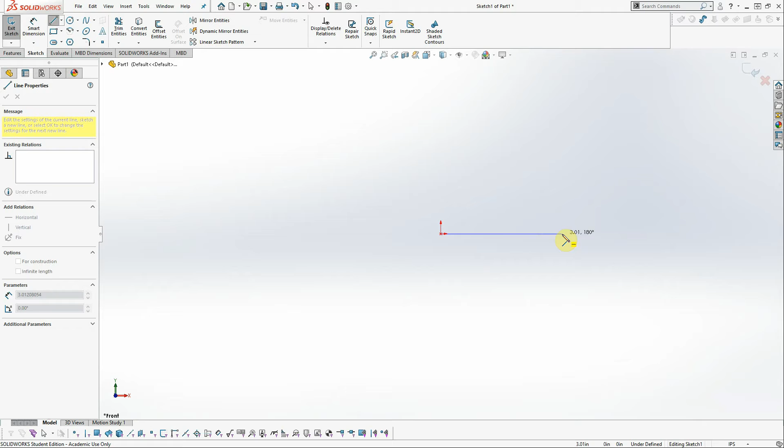It's probably the very first thing you should do when you make a part. So just make the lines, sketch out the approximate shape, sideways shape. Okay, I want a horizontal line. There it is. There's a horizontal. Just do it approximately at first, so it's at some angle. It goes up. I'm making a sketch of the side profile of the object that I'm interested in. And that closes it. I'm done with the lines.

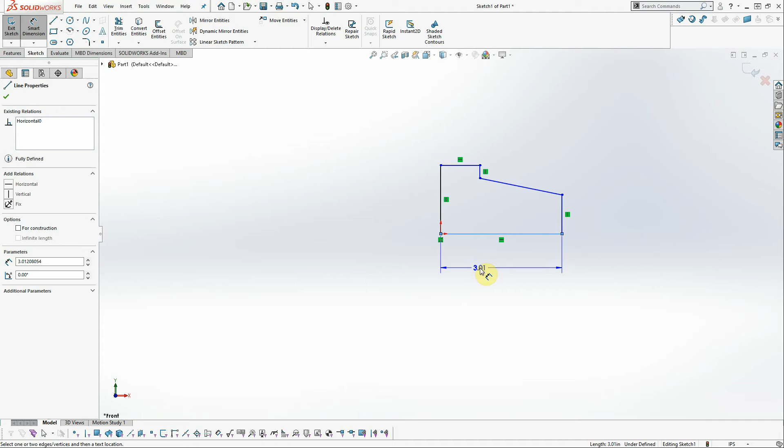Now I can start doing the smart dimensions. And this was 4. Let's go back to see what it looked like. 2.6 high, 1 wide on the top, a quarter down. Okay, 2.6. Check.

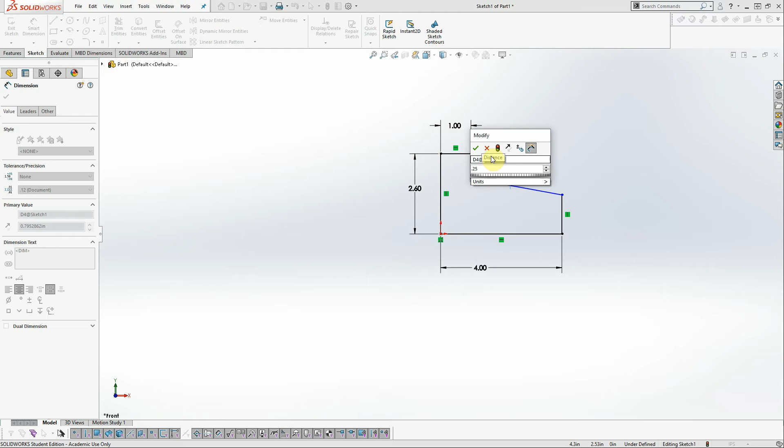This is 1. This was a quarter. And the other side over here was 1 inch high.

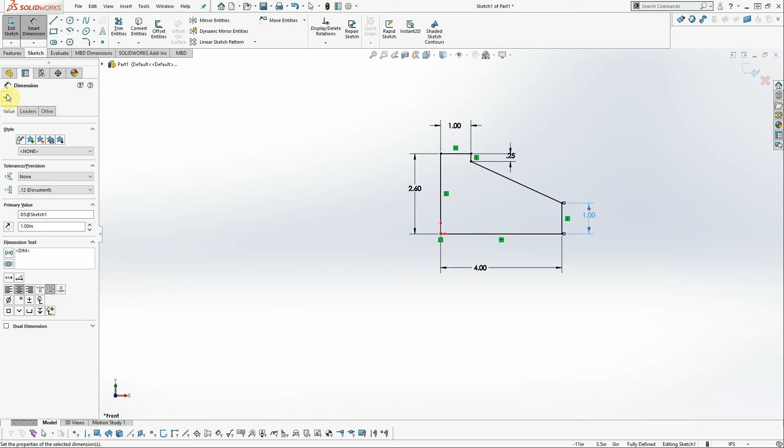Okay, now we ought to be able to extrude it 2.5 inches. B is 2.5 inches. So let's grab the dimension tool, extrude it, and 2.5. It'll extrude forward. It doesn't really matter if you extrude forward or extrude back. There we go. So we got the basics.

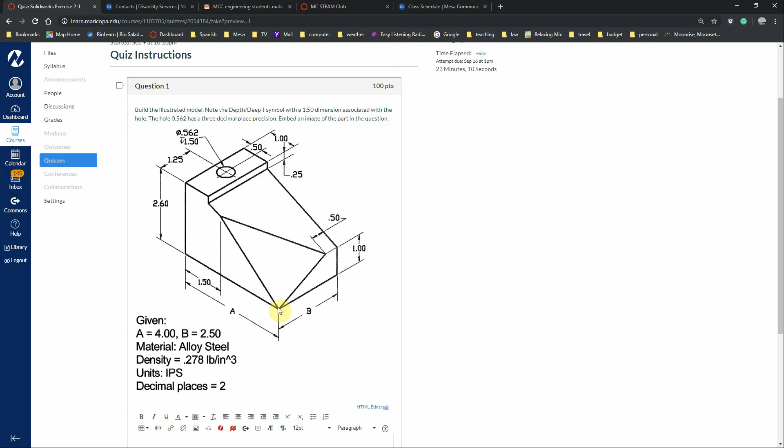Now here's the trick. We've got to make this slanty. You guys know how to drill a hole, I'm not going to show you that. We've got to make this slanty region though. So here's how we can do it.

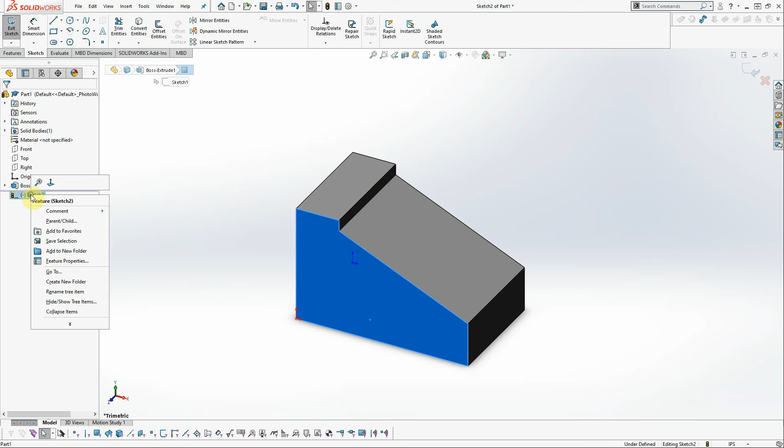We're going to make a new sketch now. I'm going to select this face, and I can select this face. I'm going to make a new sketch on it. And I want to go perpendicular to the sketch. I'm going to make a construction line, and I want that line to be, I believe it was 1.5. Yes, it's 1.5 from the vertex. So click on the origin.

Just drop it approximately 1.5. It doesn't have to be exactly at this point in time. Escape. It's not letting the green check mark do its thing. Smart dimension, make sure you're highlighting the right line. You're not highlighting this line, you're highlighting that center line. You want this at 1.5. Check.

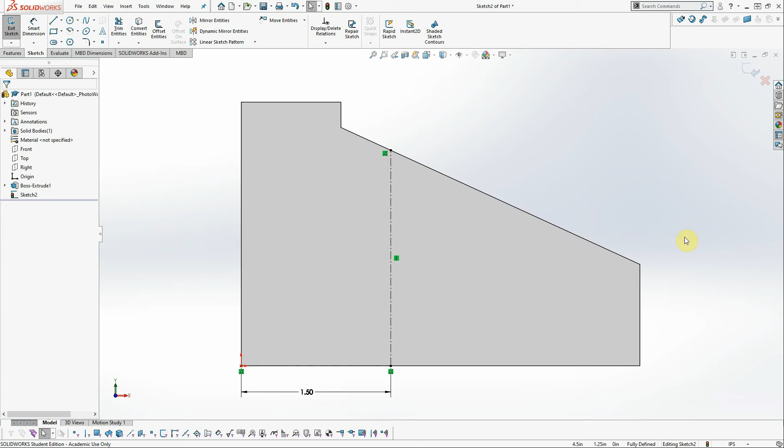Now we can make another line vertical. So now we know we've got something exactly 1.5 inches in this way. Make another center line, grab this part of this line and go vertically until we intersect this line. So we've got intersection. And escape. So we've got that line drawn. Now we have points for reference geometry, and we can get out of this sketch.

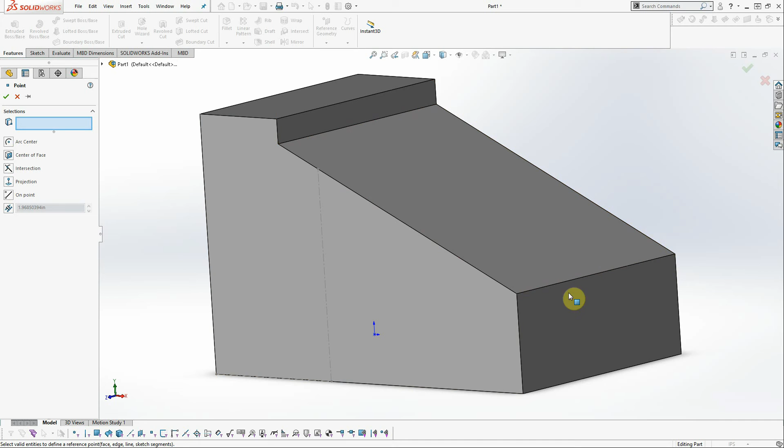Now we can make a reference geometry. Let's see, can I drop a point right there? I could make a point right there, but it's already highlighted. We don't need to make a point right there. You could. We're going to want to make a point at this vertex. We're also going to want to make a point over here somewhere. So we go through the same procedure of drawing the construction lines over here.

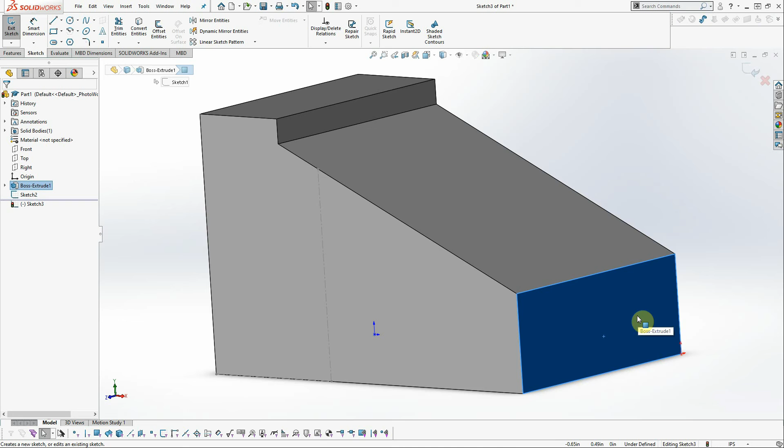So I'm not going to drop a point right now. I'm going to make a new sketch, and I'm going to exit this sketch because I want to exit. Come on, exit. There, we're out of this one. We want a new sketch. We don't want to be drawing on our old sketch, because the old sketch is on a different face. And go back and take a look at this again. It's 1/2 inch in. So this one's 1/2 inch in.

Construction line, make it 1/2 inch this time. Approximately 1/2 inch for now. Well, escape, get out. Smart dimension, make it 1/2 inch. 0.5. Check.

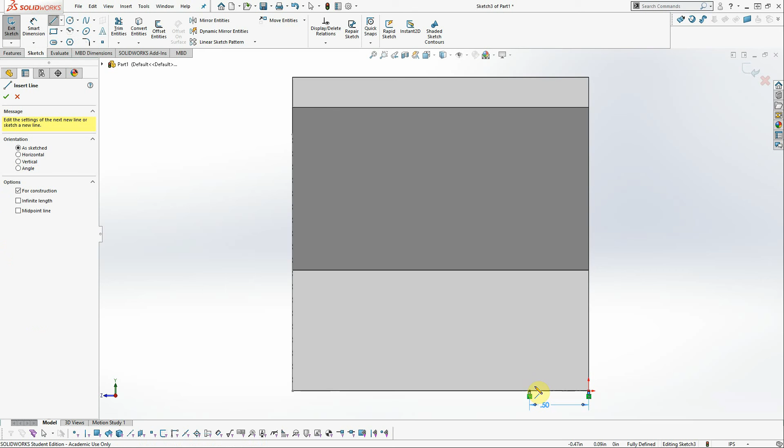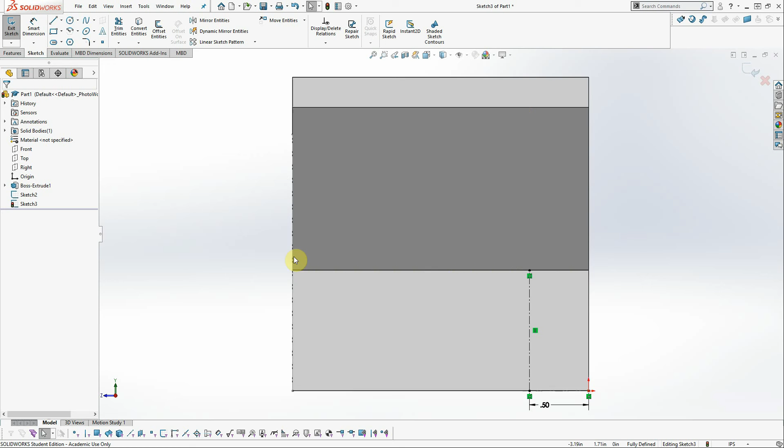Make a new construction line. Go down here, make it exactly vertical from the 1/2 inch in. So now I have the intersection of this edge and the construction line. So now I have my 3 points of the plane that make up that slanty part of this piece. Escape to get out of the line tool, rotate it a bit. So I ought to have 3 points to make up the plane, to make my sketch.

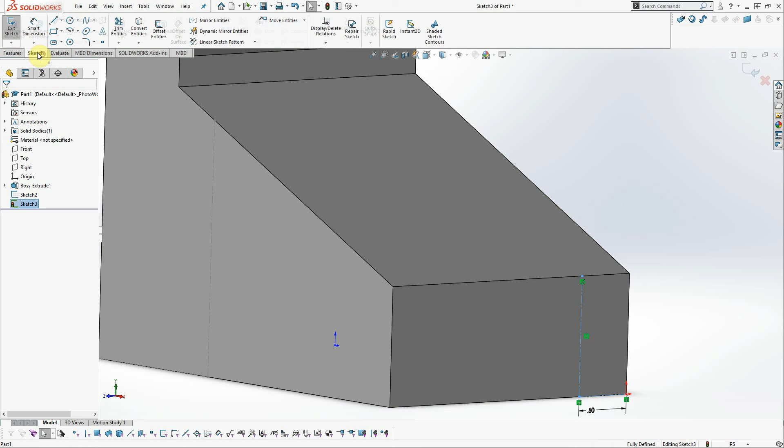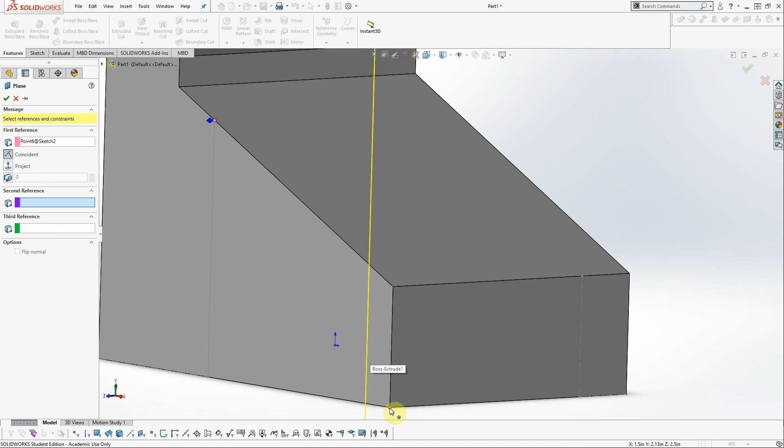So now I can add the reference geometry in the features. Reference geometry, oops, do I need to exit the sketch first? There we go, get out of the sketch first. Features, plane. Now it takes 3 points to make a plane. There's point number 1, point number 2, which was already there. We didn't need to make a, there's a second reference, point number 2. And then point number, now it's giving me a highlight of what the plane is so far. And then point number 3. Now I've got my slanty plane.

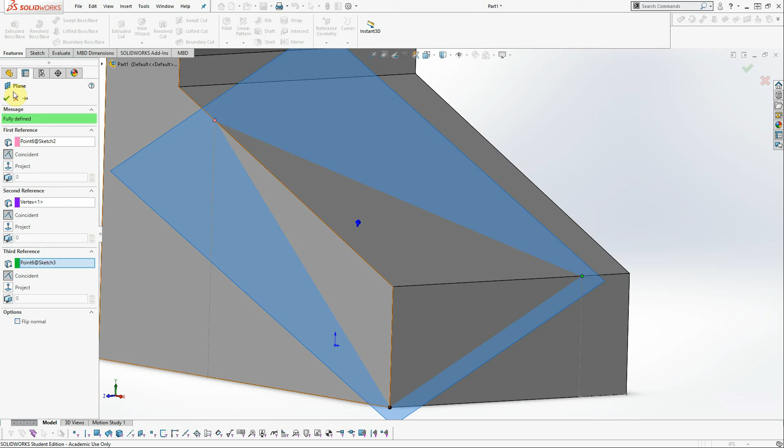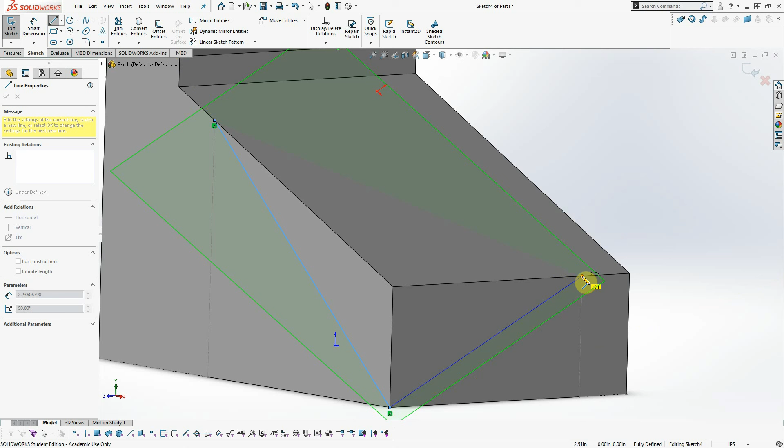I can do a sketch on it. Now I'm going to do a sketch on it, and just draw 3 lines. Just grab those 3 points again. Click. Click. Click. Make a closed figure. Click.

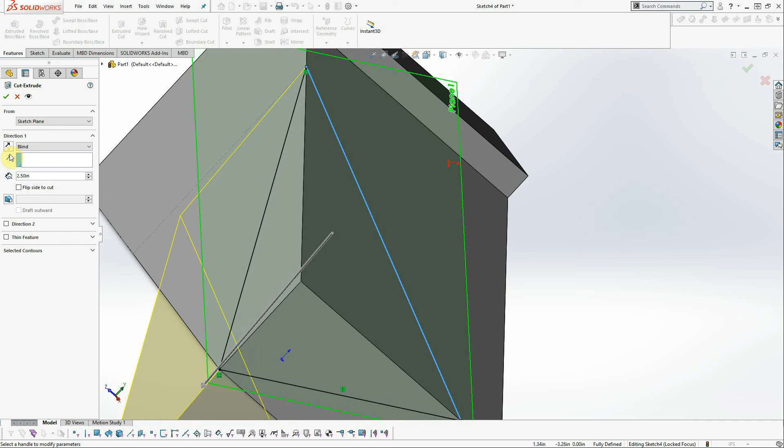I'm done. And now let's just extrude it. Extrude cut. Make sure the cut is in the correct direction, because it's going to cut in the wrong direction right now. Once I rotate it around, you can see it cuts in the wrong direction. Just go the other direction. And that should cut off the stuff that I don't want. Boom. Voila.

Get back to an isometric view, and you guys can see it, nice and cut. Just click anywhere, just get out of it. I can do the hide plane, and anyway, that gives you that weird cut. And that's all, folks. This ought to give you all the information you need for Chapter 2. So you ought to be in good shape to do all the assignments and to do a lot of stuff with SolidWorks now. Okay, bye-bye.